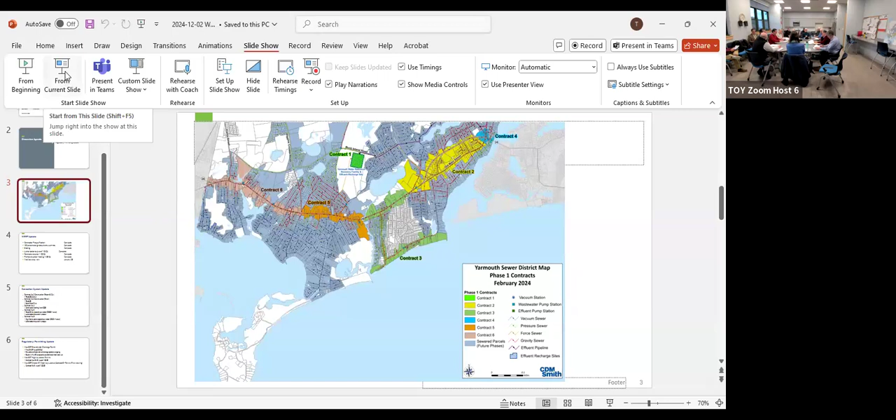Unfortunately, that will be the last extension they're willing to issue for the town at this point to stay in this year's SRF cycle. So at this point, we're just continuing to work with them. The good news is a couple of the major hurdles for those 2 contracts came in subsequent to our last meeting in early November.

On the 22nd of November, we were issued the MassDOT highway permits for contracts 5 and 6. And the Chapter 91 waterways license was signed by the governor herself on that same day, November 22nd. So those were the 2 big pieces we're waiting for. Those have come in, and now we're just trying to get the last couple of items in.

That's our list. Any quick questions before he finishes?

As Mike touched on the construction contract schedule, all of the designs are now completed for phase 1 of the collection system and wastewater treatment facility. For contract 1, the contractor indicated they'll be mobilizing, maybe doing some initial clearing and bringing equipment on site, probably for a start in the late winter, early spring of 2025.

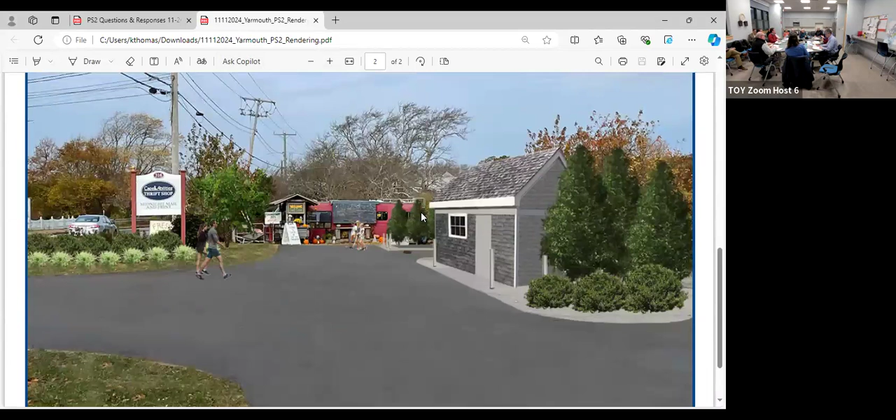A lot of us are familiar with it. Yep, the site plan is available online, and I think Mr. Wilkins has seen those. Oh, yeah, absolutely, my concerns are based off of that.

And they do make some detail clear on what Bill is referring to in terms of the infrastructure out there. Am I correct in that?

I'll keep going, we can sit there otherwise. In other words, when we start talking about wells and retaining walls, is this all something that would be on the site plan? The retaining wall is shown on the site plan.

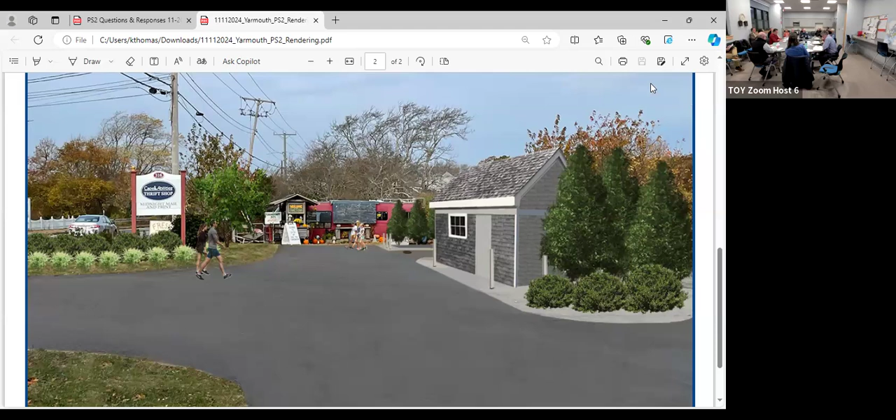But this is not information that's new to the project. No, so we're just identifying it. So it's a good question to ask. I assume that our technical engineering experts have taken that into consideration in protecting that wall.

And near the cranberry bog, maybe you've been putting some sheeting. So there's temporary supports during construction, whether it's sheeting or soldier piles and lagging installed. So there's a couple of components, just for everyone's information.

There are three main components of the pumping station. That's what we call a wet well, which is where the wastewater gets collected. Submersible pumps sit inside the wet well and then pump out through a concrete structure that's much shallower.

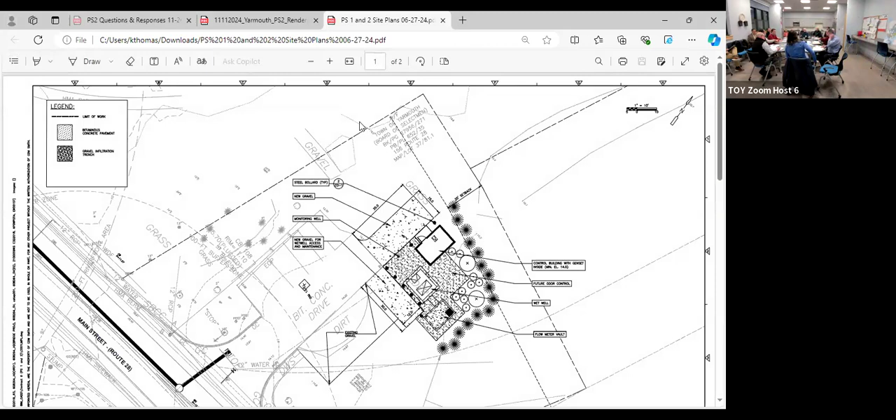That's the valve vault, which contains valving, as the name implies, and piping with access to manipulate something to turn off the force main if need be.

The third main component is the pumping station control building itself, which for anyone who's seen the rendering, is essentially an 11.5 by 17-foot precast concrete structure made to look like a small shed, containing all the electrical equipment inside.

Behind the control building is a fenced-in area that will have an emergency on-site generator that sits behind the control building.

In terms of the construction for the wet well, which is a deep structure, again a precast concrete structure, we're calling for temporary shoring to be installed so there's no impact to the surrounding area while that excavation is done. It's about 25 feet deep from ground surface everywhere along the structure.

So for that shoring, the contractor will be required to hire a geotechnical engineer to design the shoring, as well as a dewatering system that works in concert with the shoring. That will get submitted during the shop drawing process of construction for us to review.

Then the contractor will use those plans to excavate that hole to install the structure. So it's really digging a hole, shoring a hole, putting in the precast system, and then backfilling.

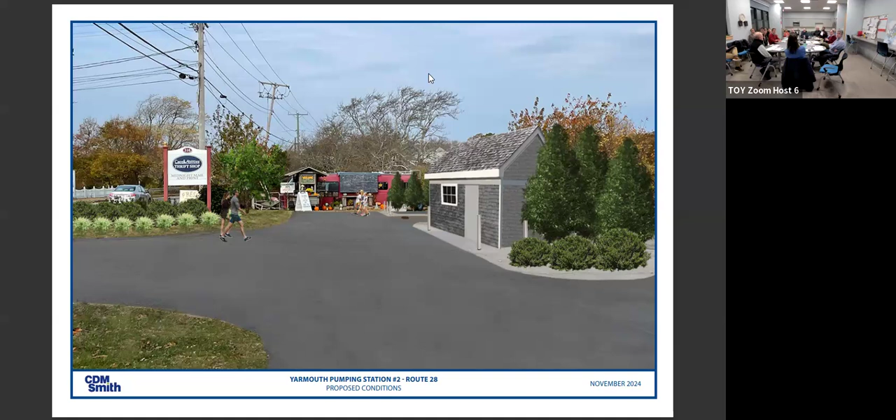But you're right, there is a grade change. Because we're in the floodplain here, the first floor of the control building has to be up at elevation 14, which is 3 feet above the 100-year floodplain elevation of 11, just to protect the electrical equipment. Looking at this, it would look as if you can access the farm stand. How much of what is there now are you losing if this were to go through? On a flat plane, almost nothing, but with the elevation change, it makes it quite dangerous for people to access the farm stand. We're talking at the end of that 12-foot, if we could go back to the plan.

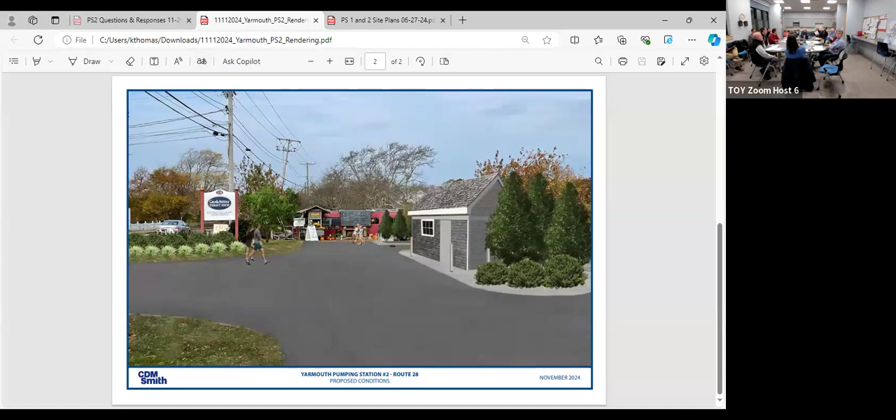So you're saying the elevation goes downward towards the farm stand? It will, yeah, at quite a degree, and it is graded, not stepped. If we could actually find the plan that shows grade heights as well as the stormwater catch basin, which was missing from this plan. This plan doesn't show grade height changes and it doesn't show the stormwater catch basin.

My question was really, you lost some parking, how much parking did you lose? Quite a bit. We would lose about 7 accessible spaces, easy access for handicap, which is the majority of the clients that come.

There's no parking on any of that shaded area? You could, but how dangerous is it for one car to pass? I'm asking what they're planning for - you get the shed, you can't park on the shed, but you could park next to it or around it. The sewer department will only need access about once a day, so that driveway will be available most of the time.

It's every real estate agent's question - how many parking spaces did we lose that are there now? You're saying it's 7, 6, 7? I could show you based on the plan, I can see how you get to 7, but most of that stuff's underground, so wouldn't you get to keep the parking spaces in this case?

This area here, you can see the dark shading is paving, so this is asphalt, and yes it does slope down back toward the farm stand, quite a bit - about 3 feet or so. This area here is all below grade, intended to allow vehicles to turn around, so you can pull in and back out to get out of the site, so you could park there. The wet well will have some reveal sticking up, so you can't park there, but you could certainly park on this side of the building, between the building and the wet well, and out here. This is actually going to change at some point.

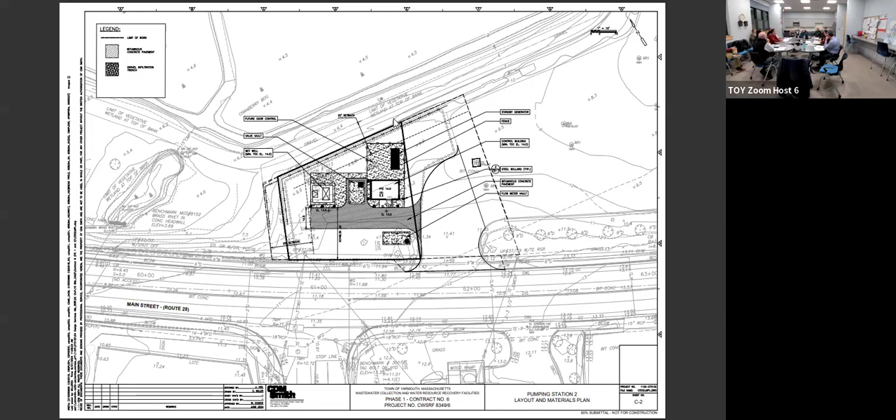Of course, it was posted about, but it seems a lot of people are confused, thinking that's sewer water getting pumped out when it's just groundwater. So maybe, not my thing, but maybe a little more information out to the public on why that's there would be huge.

You know, that was... can I ask a quick question? I don't know if we're ready for it, but the elephant in the room is Monday night.

Well, like I said, what's going on isn't necessarily on Monday night. I would want you to get involved in Monday night. The forces, I guess, are in motion at this point to get to town meeting.

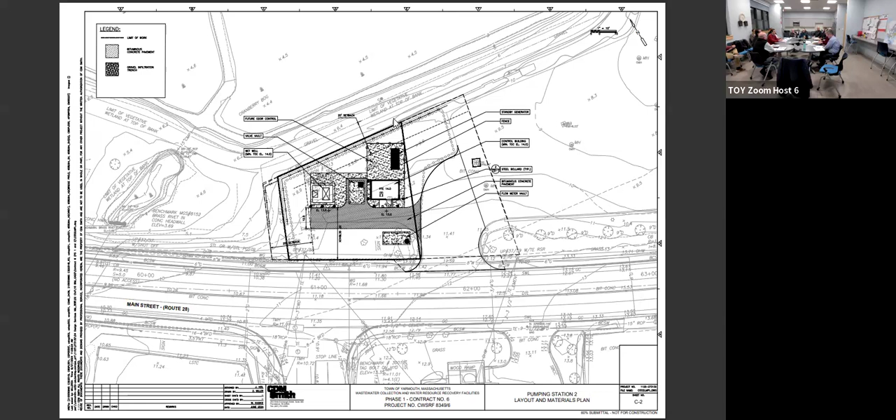As much as we can bring out in terms of information, that's in our charge, and that's what we should do. We may be called upon in the meeting, handled by the selectmen, at that meeting, but we kind of have to respond with that regard.

I'm not sure if we're ready to short-change or short-circuit that process. That will happen regardless of what happened here tonight, what might happen a month from now, and what may happen in the future.

Being asked of, are you familiar with the question on the... No, I haven't seen it.

Sparrow, if I can make a quick suggestion, there's a town administrator here tonight, and one of the most respected selectmen here tonight. What he needs is the help of the Conservation Commission. Come down and take a look where he proposed the parking area be, and get some help from town engineering on the curb cut. If that happened, I think you've got somebody knowing the town's going to help them.

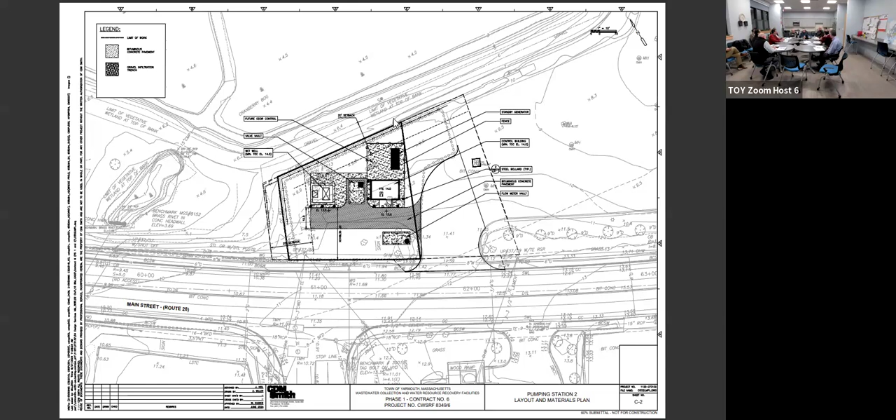Well, I think the best case scenario, both economically and environmentally, would be to move the pumping station. I know, but we've talked about it, there is another solution as well. Sure, but I think we've passed that time. We only have a week, it goes to vote in one week. We've got town people here who can make things happen. We cannot negotiate, we understand that. What you guys do with the officials in the room, we're waiting to find out. But anyway, it's to move the pumping station away from the farm.

At some point in this process, it could not include us, until tonight, came to a point where the proponents were, my way of describing Mr. Wilson, to go to town hall and go to a special town meeting and ask this question, see if the town will vote on the following petition: to move pump station number 2 to a different location, away from agricultural wetlands and away from the existing farm and farm stand. That's what we're voting on, it's a yea or nay, and whoever shows up at the meeting gets to vote yea or nay.

It's a 2/3 vote. He had 800 Yarmouth citizens verified sign that petition. Now, if a quarter of them show up to town meeting, it wins. So we can, you and I, we can do this all night long. It's just like the kid, that's all he's looking for.